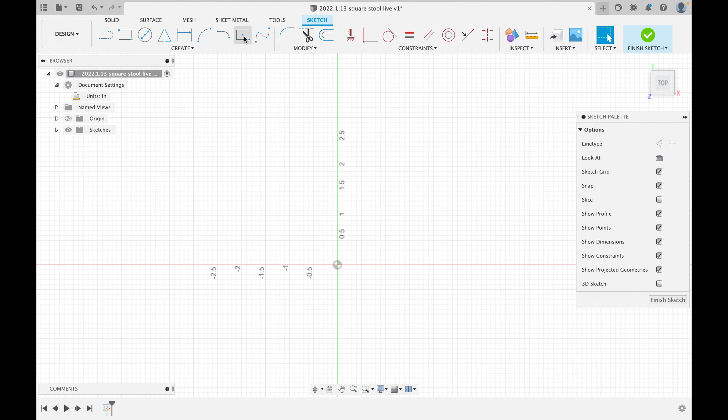We're going to start by clicking on new sketch, and we'll model from the top down. The first thing I like to do when making a sketch is create a center point rectangle and create a box from the center. Because this is a square stool, I want to make the two sides equal, so I'll click on the equals constraint and click on one side, then the other. Now those two sides are exactly equal, and I'll hit escape to get out of that tool.

Now I'll click on the dimension tool, click on any of the sides since they're all the same, and click on the background. How big is our square actually going to be? We're going to model this as a 16-inch stool, which is a lot bigger than our view screen, so I'll scroll down with the scroll button on my mouse, and now I have a 16-inch square. I'll hit escape to get away from the dimension tool.

Now, that's not the stool itself - that's the boundary of the stool. So I'm going to double-click on any of those sides to select all four, and hit X, which turns that into a dotted guide line. This doesn't actually impact anything in terms of cutting up the sketch - it just shows us where the outside lines are.

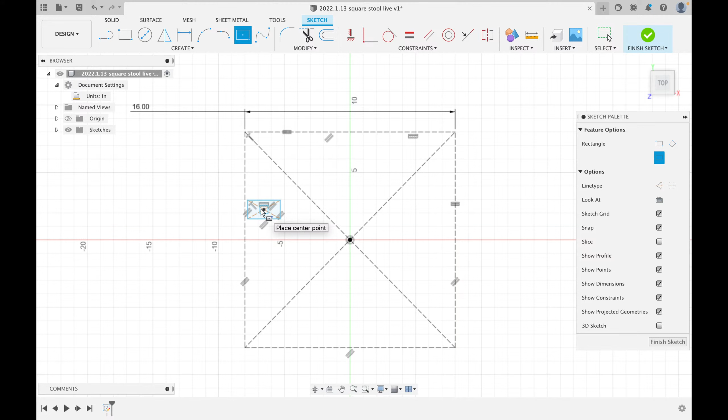Now what we want to do is create a square leg. I'll create this with a center point rectangle, and draw a square leg - it doesn't matter exactly where, just somewhere to start. We're going to make that square leg so it's a little bit inset from the outside. So I'll hit the equal sign and make these two sides equal to each other.

Then I'm going to go to the dimension tool and make a dimensional choice that each of these legs is going to be 1 3/8 inches on all four sides. Now I want to figure out where to put that.

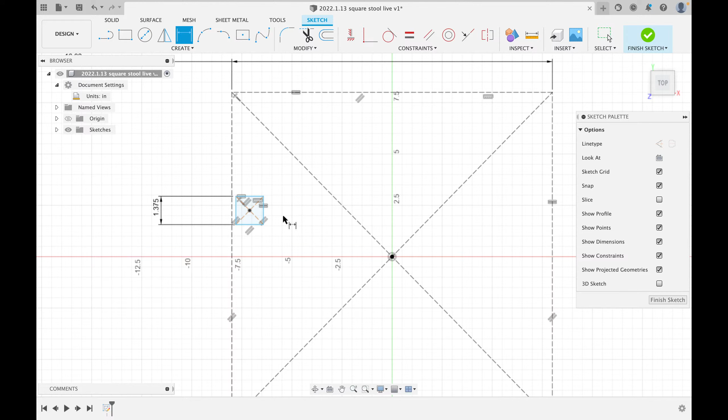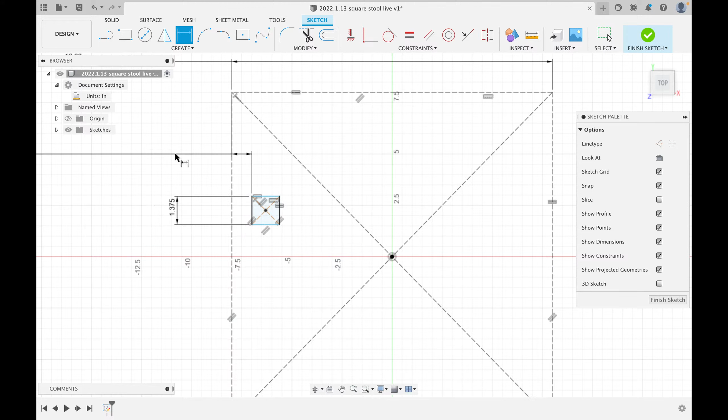If I'm going to have that inset from the outside edge a certain dimension, all I have to do is, again, with the dimension tool selected, select the outside edge, select the side of the leg, and I need to type in a measurement. Now, I'm going to have this inset 1 inch from the outside. But I'm going to have it inset 1 inch from the outside in both directions. So from the side and from this side, 1 inch.

But instead of typing in 1 inch, I'm just going to say it's going to be equal to this by clicking on the 1 inch already there. The reason I do that is not because I forgot it's going to be an inch. It's because if I change this inset measurement here, I want it to change the other one. And if I link them together like this, every time I make one change, I make the other.

Now you can always drag these measurements around so that they're easier to see. I'll drag that one over there, and I'll drag this one over here to be right next to it so that I can see that they're both an inch. Make sense? We can put this one down here so they're even closer to each other. And this one, this is an inch and 3/8. So we'll keep that in mind. And our 16 is the dimension of the outsides of the box. Now, we have that already done.

If we were going to model this easily, we would be able to make, in theory, our top and one leg. Not quite a box yet. What are we going to do about everything else? Well, we want rails at the top, and we want some stretchers down below for our stool. The stretchers are going to be almost at the floor, but they're going to be exactly the same size and shape as our rails, which are going to be, remember, this is a square stool, they're going to be squares.

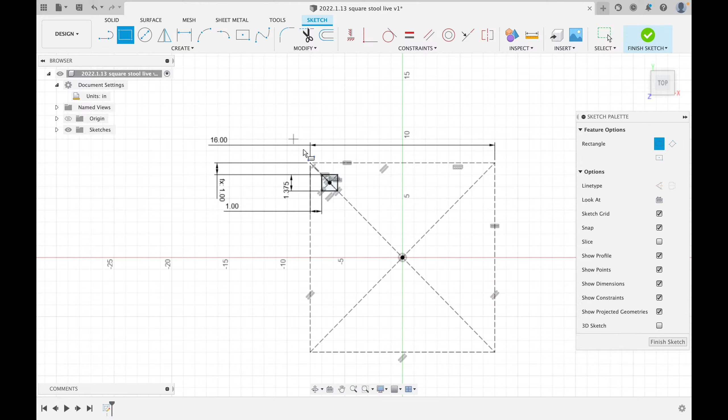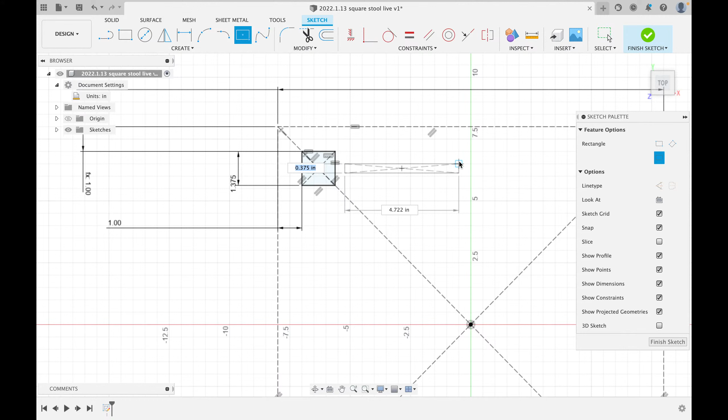So let us take, again, our rectangle tool, and we're going to zoom in, and actually we're going to use our center point rectangle for this, and we're going to draw a center point rectangle that goes from somewhere inside that square to somewhere else inside that square, still in that left top quadrant. Okay? Now, I want that to be exactly the same size as that center piece. And that makes it very easy.

So in these constraints, what I want to do is, with the coincident constraint, make this point the same as this point. I'm going to make this point the same as this point. And I am going to make this line line up with the center point down here. So now we have this exactly in the right place.

Now there is one other thing that we have to take into account, and that is that we're going to have to join these pieces of wood together. We're not modeling in metal where we would just weld them, and we're not modeling in plastic where it would probably just be molded as a single piece. But in wood, we have to deal with joinery. So that means we are going to make a decision about how to join these together.

What I'm going to do is I'm going to join them together using a through mortise and tenon, which is probably the most common joint to be used. But for now, we're not going to worry too much about the mortise and tenon. We're going to worry more about making these three-dimensional models.

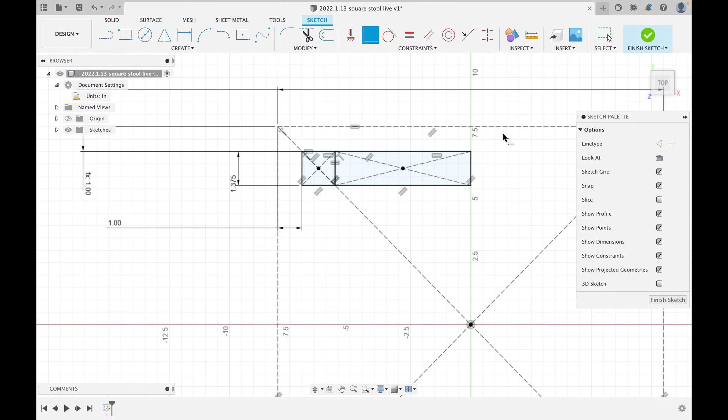So we're not going to worry too much about it for the moment, but we will deal with that after. We're going to come back to this sketch in a minute, but we'll say finish sketch now. First, I want to draw the leg. So I will come up here and I will click Extrude. I will click on the leg blank, and I'm going to drag that down. So you can see it's going negative.

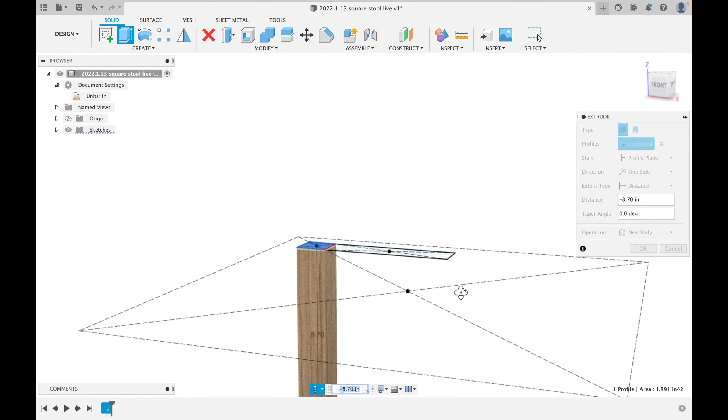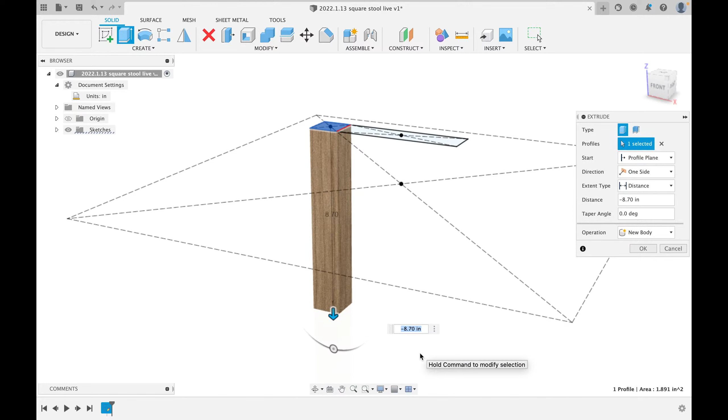How big do I want this stool to be? Well, we're going to give it a nice thick top. The top is going to be 1.5 inches thick. So we want the stool to be a square, and that means we're going to make this... wait a second. Yeah, we want our stool to actually be 14.5 inches, but that needs to be negative to go in the opposite direction. And we're going to say new body.

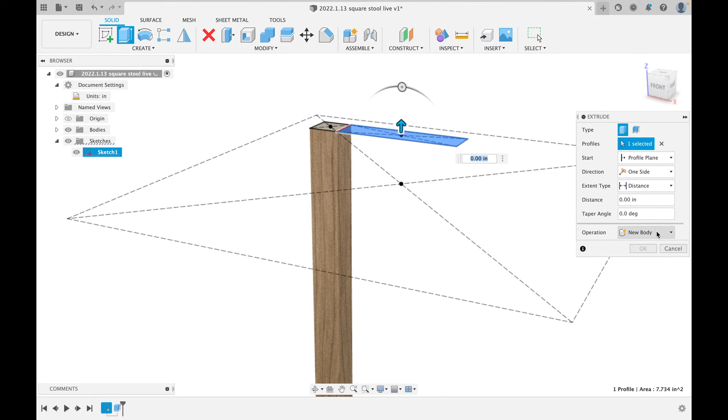Now our sketch is going to disappear, so we can open it back up and turn it on by clicking the little eye. And we're going to model part of a stretcher, part of a rail. Again, we want it to go down, and we're going to see how big this piece is. Do you remember how big that is? Well, we're going to say it might be an inch. I know it's not an inch, but we're going to say it's an inch. I'm going to check to see how big it is, though, to show you how to use the measurement tool.

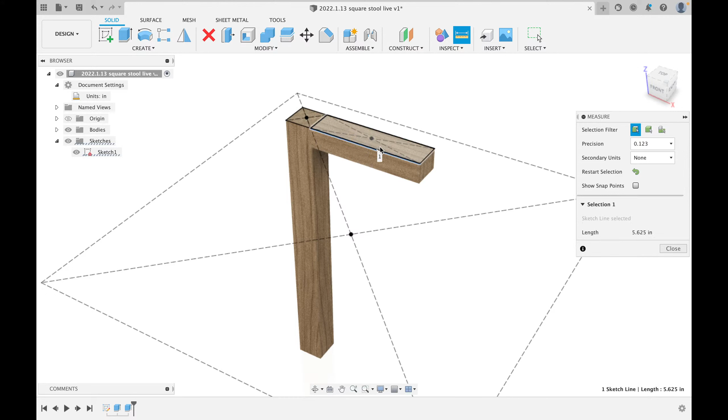If I click on this Inspect, and I click on this line and the other line, it'll tell me it is 1.375 inches, which is an inch and 3/8. So if I go back here and I look at the bottom, this gives us my history. If I right-click on that extrude function and hit Edit Feature, and I change this from -1 to -1 and 3/8, and I hit OK, it has now changed it to be an actual square that is going out from the side of that piece.

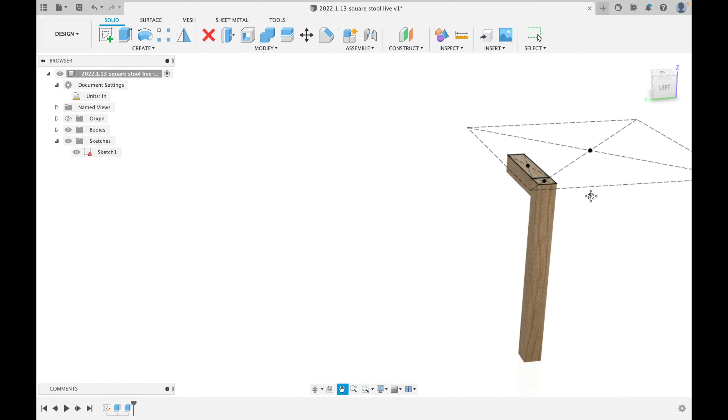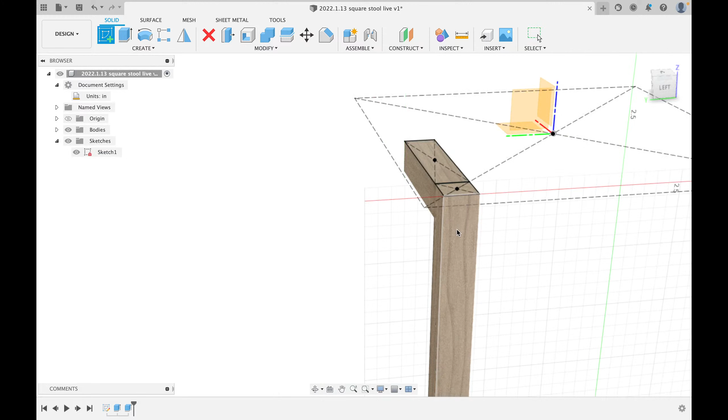All right, we're doing pretty well so far. Now, let's make our mortise and tenon. We've got a few other design decisions that I want to talk about in here, and I'm thinking about them, and as we see them, we might change our mind on how some of them work. I'm going to show you exactly how that can be done. But for now, I'm going to draw the outside face of our tenon on the outside face of this leg.

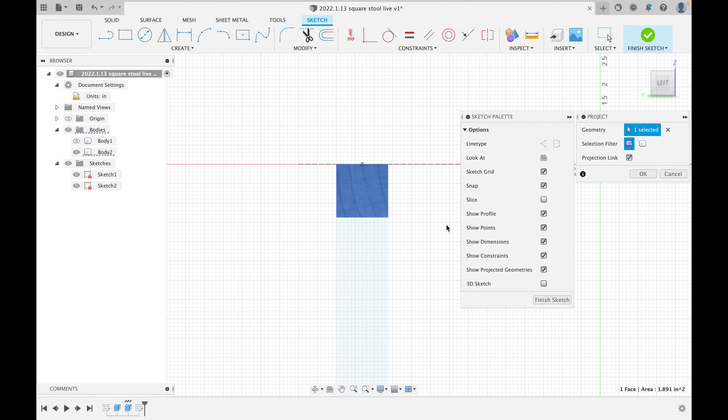Now, I can't see where that other piece is. I know it's an inch and 3/8 down, but I want to be able to see it. So I'm going to open up my bodies, and I'm going to turn off the leg. I'm going to hit P for project, and I'm going to click on this end of the rail and hit OK. And what project does is it allows me to copy the dimensions of any other object so that I can see them in my sketch. So now I see this. Well, I want to draw a square tenon on the end of that piece.

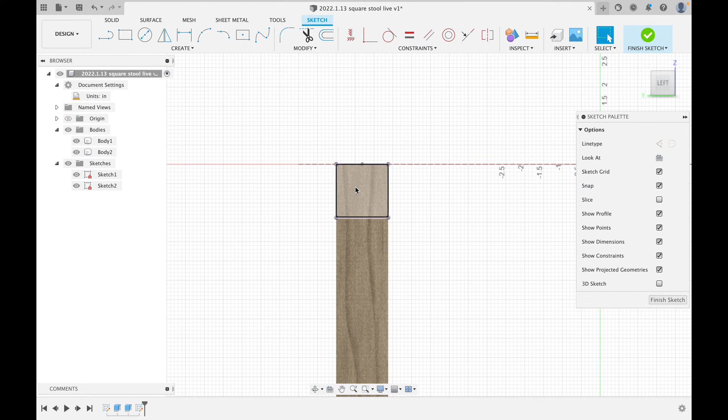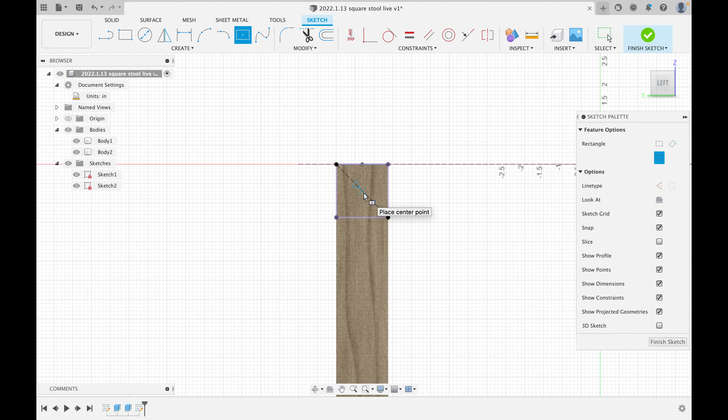So I'm going to draw a line going right from corner to corner. I'm going to hit Escape, click on the line, and hit X to make it a guide. So it's not going to divide anything up. But that line goes right through the center. Now if I hit Center Point Rectangle, and I find the center, you can see there's a little triangle telling me it is the center. So that's the middle of that line, and I'm going to draw a box.

Now, I want that to be equal, which we've already done, one and then the other. So it is a square, and I'm going to give it a dimension. Click on the Dimension tool, click on any side, and I'm going to make that 5/8 of an inch. And that is the dimension of my tenon when I look at it from the end. Now, if I hold Shift, even in a two-dimensional sketch, I can rotate around and see where I'm drawing. And I can now see that I have drawn that on the end of that piece.

Now, if I drew this and I was going to have a tenon that went all the way through, and then I put another piece on there and had a tenon that went all the way through, well, I would suddenly have a huge problem because those tenons would actually interact with each other.

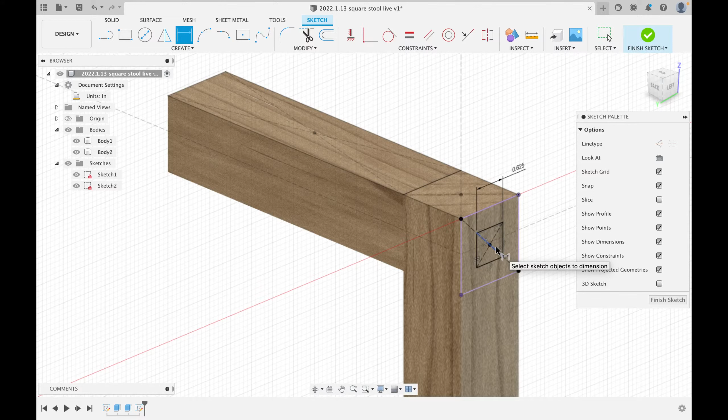So we have a decision to make about these tenons. I can either make them through tenons, and they will conflict, so I can't have both of them through. I can only have one of them through and then one of them be blind. Or I can make them blind tenons, both of them, and one goes in part way and the other one goes in part way.

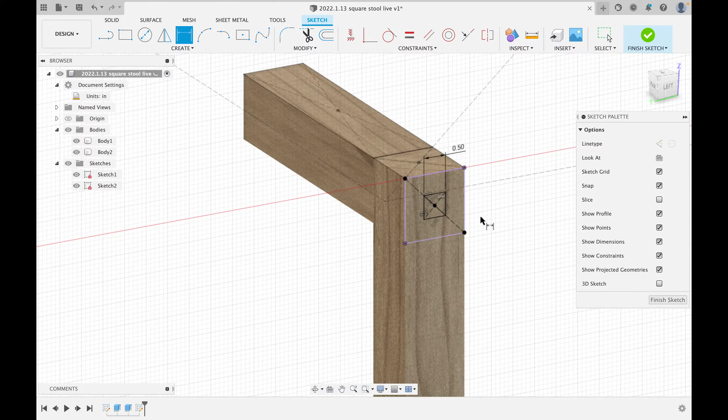Or, and I think this is what I'm actually going to do, on one side I will have one tenon, and on the other I'm going to have two square tenons. And I'll show you how to do that in a second. But if I'm going to do that, this tenon is a bit large. So I'm going to double click on it and say that's 1/2 inch instead. And we're going to have two other tenons go right through.

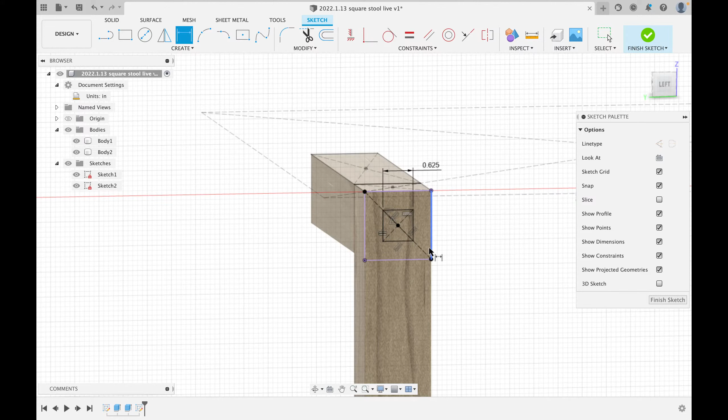Rethinking that, we could have one tenon on the bottom and one tenon on the top. That would also work. So there's lots and lots of ways we can do it. I think we're going to make it 5/8, like we said before, and we're going to just have a blind one going in from the other side, which is totally legitimate.

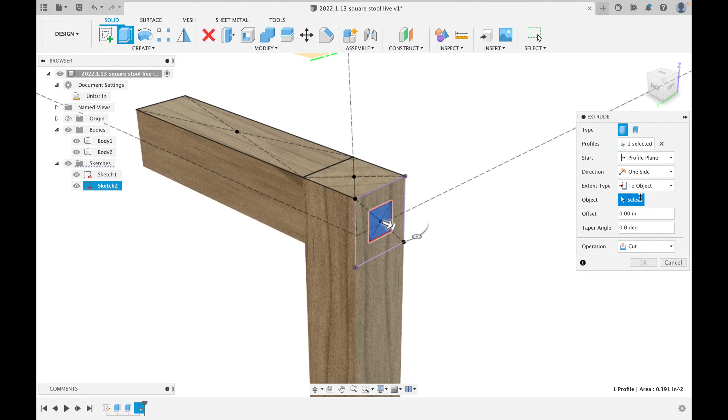Now if we hit Finish Sketch, we see that we have a tenon right here. We want to make that a through tenon, so it is going to be extruded from the outside here, going in, which means it's going to be negative, but instead of distance, we're going to say to object, rotate around, and it is going to go all the way to the inside face of this leg. Now, it's going to say cut, but we want to change that so it is a new body. And that new body is going to be right there. We haven't cut a hole for it yet, but it is exactly where we want it to be.

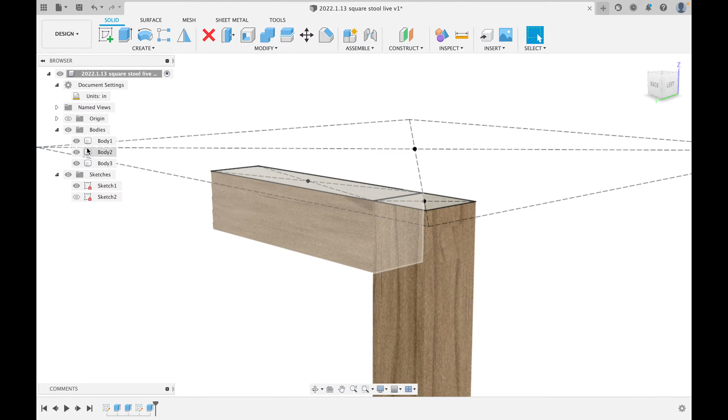We'll turn off that sketch so it doesn't get confusing. And I am going to add that tenon to that piece of the leg. So I will say combine. Not cut, join. Turn off keep tools, and I'm going to add that rail, and I can just go up here on the left. I don't have to worry about clicking on it on the diagram. I can just hit body 3 and hit OK. And now you can see I only have two bodies, this leg and this rail. So if I turn off the leg, you can see the rail has a big square tenon on it. But if I turn off the other one, I haven't actually made a hole yet.

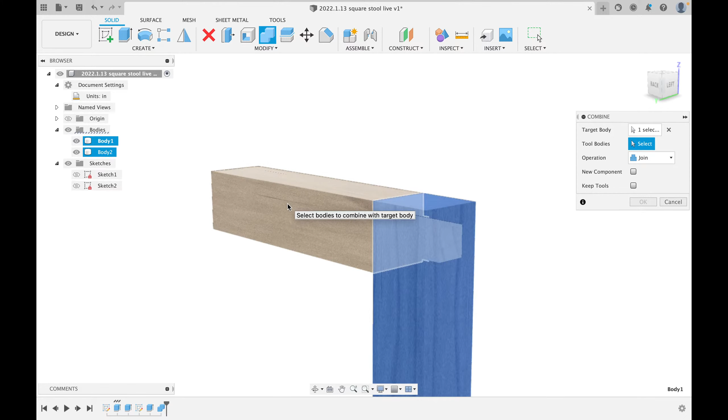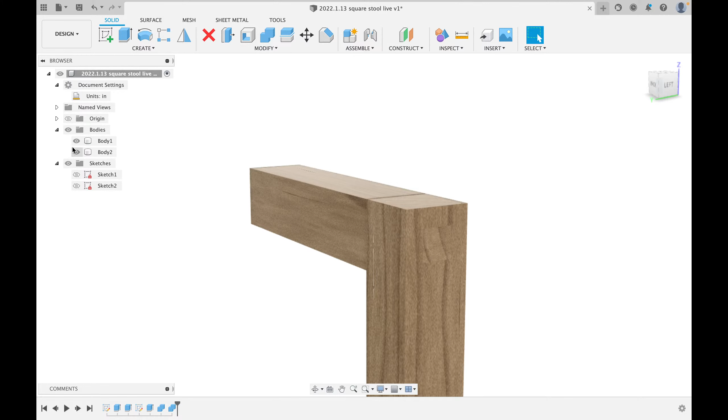So now if I go back to combine, and I take the target being the leg, and the tool being the rail, and I change this to cut, I'll turn keep tools on because I don't want it to delete the rail, and hit OK. If I turn off the rail, I now have a mortise that goes all the way through. And it's exactly the size of the thing that we used to cut it, which is that part of the rail. Now that's great.

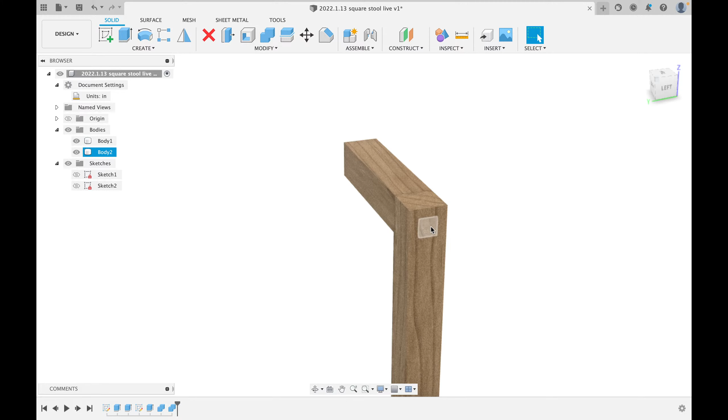Something that we want to think about is we want the same thing on the other side of this leg, but instead of it being a through tenon, we're going to have it be a blind tenon and only go in as far as the inside of the tenon we already have. So if I want to mirror that across that corner, that means it's like sticking a 45-degree mirror up against that corner. So I'm going to say construct plane at angle, and I'm going to turn 45 degrees and hit OK. Now, I think we've actually gone the wrong direction on that, but we'll see in a second.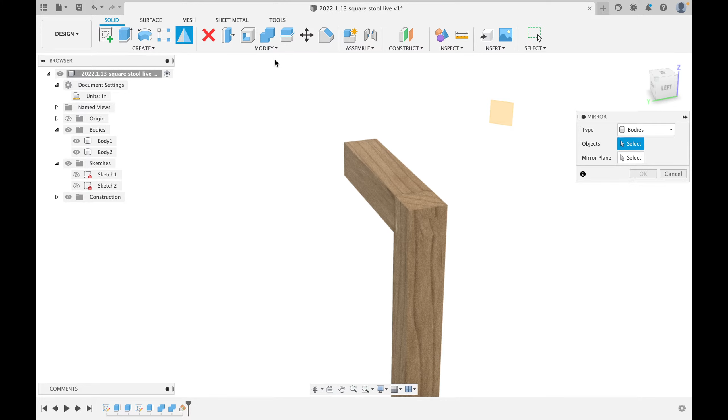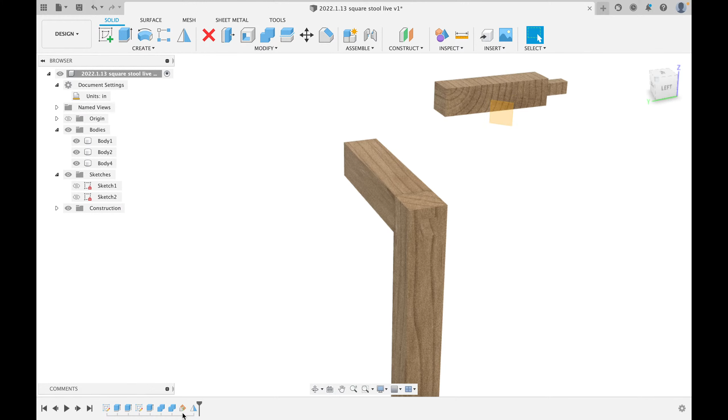If I say mirror, and I check this, and I click on that mirror plane that I just created, it's going to put that totally off in the wrong direction. But that's okay. We don't have to worry about it. I'll hit OK, and it's going to be in the wrong direction, but I can go back to the history, say Edit Feature, and I can drag it all the way around to be 135, which is 45 in the other direction.

Doesn't want me to drag it, I'll just type it in. 135, and now you can see it has mirrored it across this edge. If you look at this mirror plane, you can see it's just like actually putting a mirror there at a 45-degree angle.

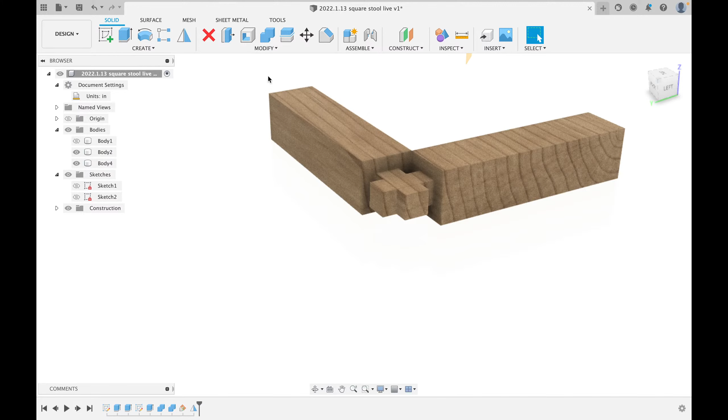Now, how do we deal with the fact that these two mortises, if we turn off this leg, and these two tenons are intersecting with each other? Well, I want to cut the end of one of those tenons off. I want to cut the end off this one that we just made. So I'm going to say split body, that body, and I'm going to slice it with the inside face of this tenon.

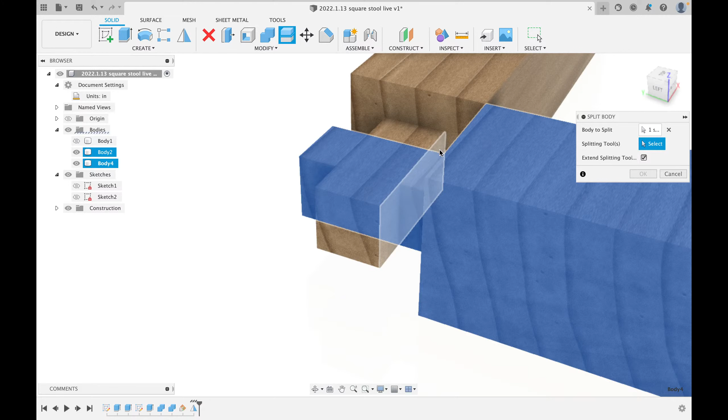I'll just zoom in, and now I'll pick this inside face. And you can see it's going to cut it off. So now we have one piece and another piece. If we right-click on it and hit remove, that part of the tenon is gone, and the only part we have left is the segment of the tenon we're actually going to use to join those pieces together.

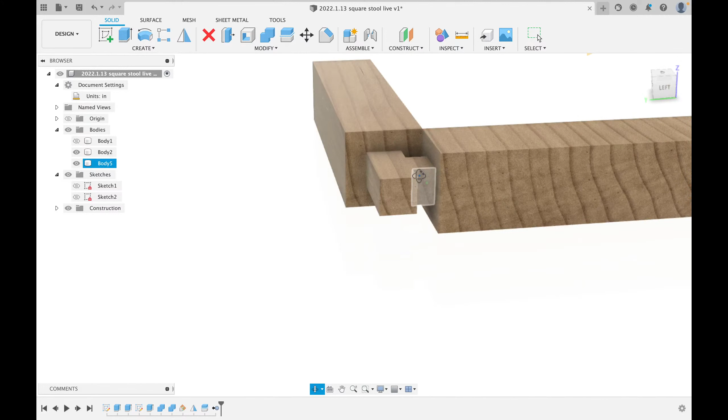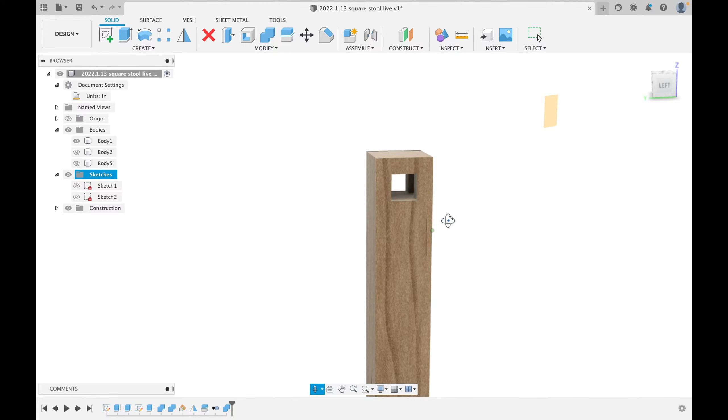If we turn back on the leg, we can do the same thing. We will cut our leg with our piece that has the tenon on it. And now if we turn them off and rotate around, we can see we have one through mortise and one blind mortise right there in our leg, exactly fitting the pieces that are going to fit into it. Now, one of the nice things is that we've now done all the basic joinery for our stool.

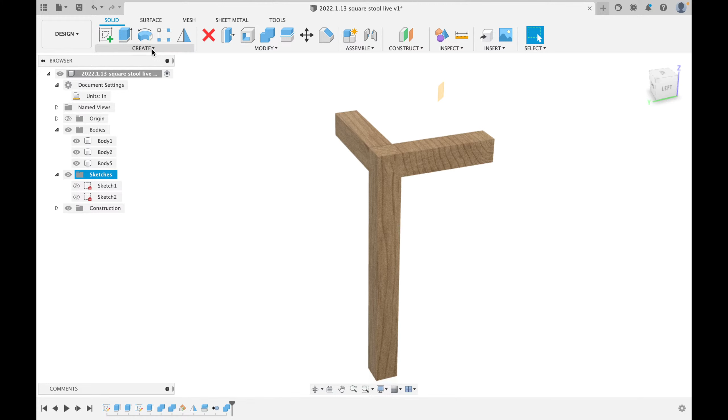But, and this is a fairly significant but, we want to have a stretcher that is close to the bottom that is exactly the same as the two that we have up here. So if I go up here and I say create rectangular pattern, and I pick these two bodies, and I say I want a direction, and it is the up and down direction. I'll drag them down. Now, I don't need 3, I only need 2. So I'll change it to 2,

and now I look at it. Where do I want that stretcher to be? Well, I want it to be about there, spaced 9.5 inches down, and I can always move it. Let's say we want it 10 inches down, and I can say OK. Once it processes, there we go. Now we have the square stretchers.

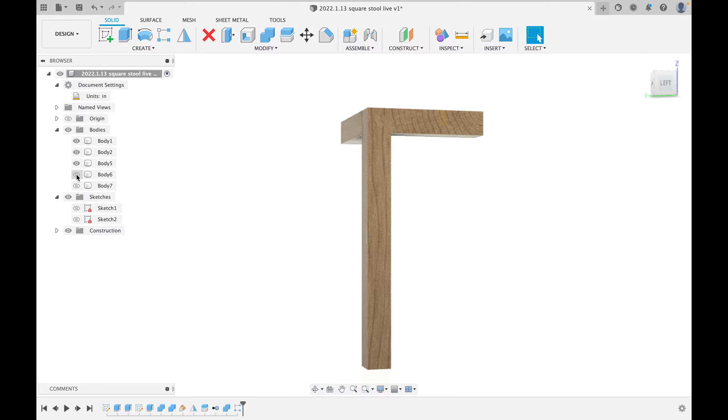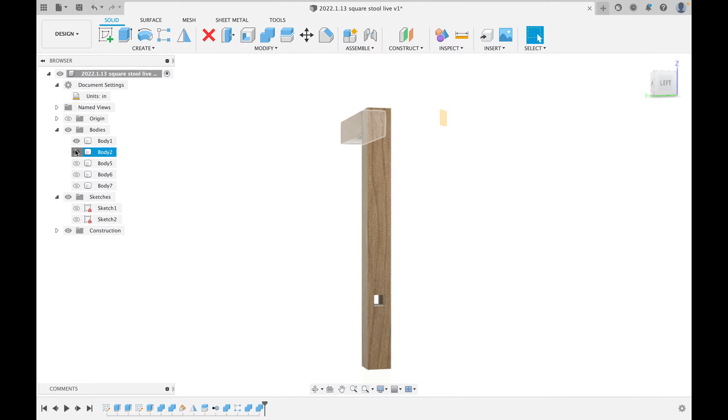Now, of course, if we turn those two off, we don't have any mortises for those tenons. So we'll do the same thing. We'll cut our leg with one side, and we will cut our leg with the other side. If you select the wrong one, you can just turn it off. Cut our leg with the other side. And if we turn all 4 of these off, we'll see that we now have mortises for all 4.

Now this is getting a little confusing over here in the model. So what I'd like to do is create a few components. So I'll say a new component. A component is just a group of bodies that you can change and group and hold together. You can even put components in components. Think of a component like a file folder. You can put a file folder inside another file folder, and you can put pieces of paper inside one of them. So you put the papers into a file folder, then you sort the folders into another folder, and you can sort all of those into another folder, and that's how components really work.

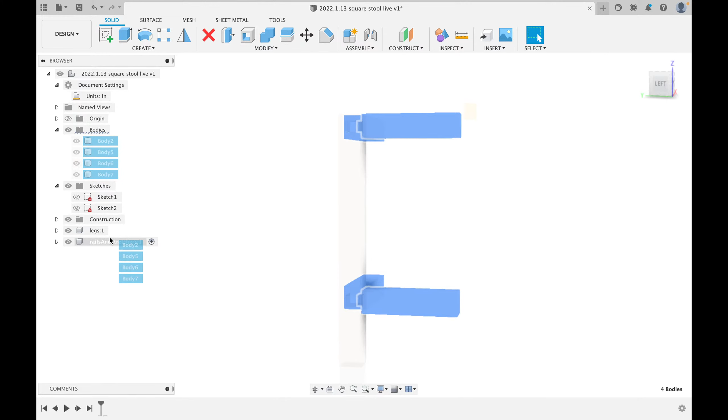So we're going to say legs. We only have one so far, but we're going to drag our leg into our legs component. We're going to say another new component, and our new component is going to be rails and stretchers. We're not going to worry too much about keeping them separate. This is a really simple model. We're going to put all 4 rails and stretchers in a rails and stretchers component.

The reason I've done this with the capital letters in the middle is just to make it easier to read. You don't have to do that. You can just type it all lowercase. You can put a capital letter on the first one. Totally up to you. The names are just for your reference.

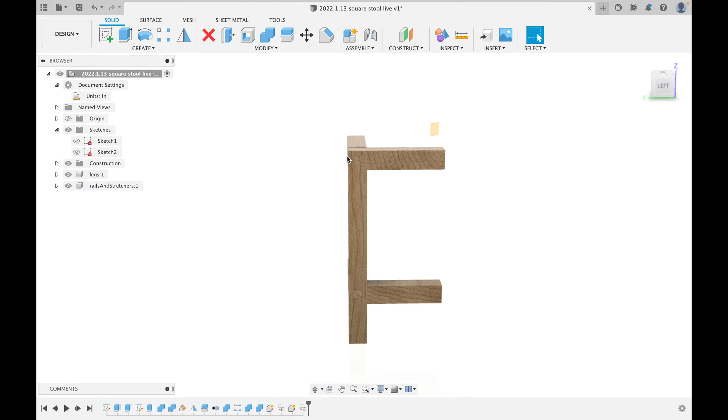It calls them component 1, component 2, component 3, just like it does body 1, body 2, body 3. And this is just to make things a little easier for you. Now, I have this already here, and I'm looking at this, and I think I'd like to go back and make a change to my design. And the reason I want to make that change is because I want to make it look more square.

So I'm going to go back and edit this, and I'm going to drag this piece down so that it is actually closer to the ground. And that feels more like a square to me. And that's fine. Now, we're still missing the top component here, but we'll go back and put the top on in a second. The first thing we want to do is we want to have 4 legs. And we want to have complete rails and stretchers.

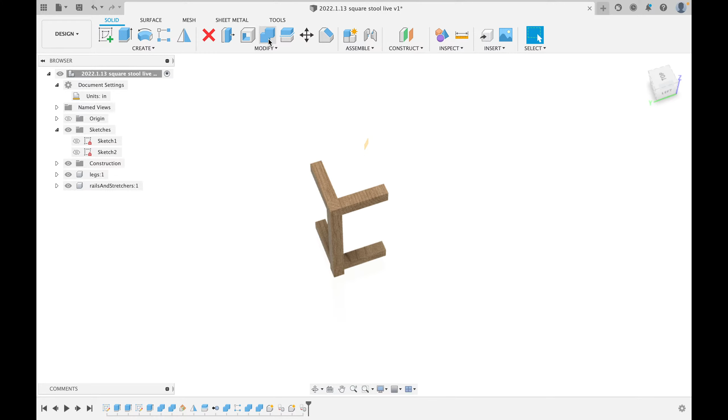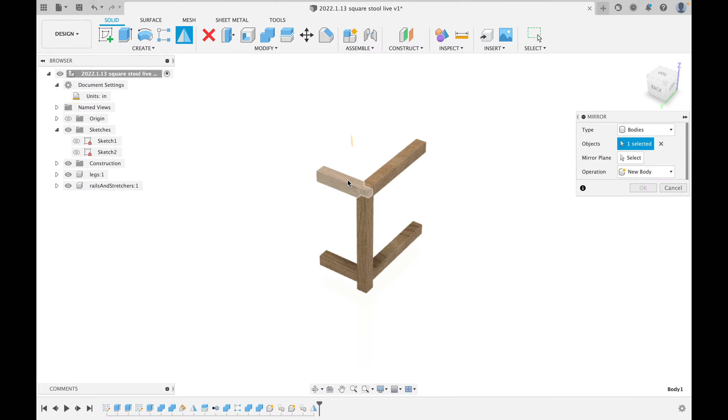So if I say that I want to mirror these two stretchers, these two bodies, and I want to mirror them across the center line and join them to each other, and I do the same thing, repeat, and I pick these two and mirror them across the center line. Well, I seem to be already doing pretty well. I've already got them there, and that's pretty good.

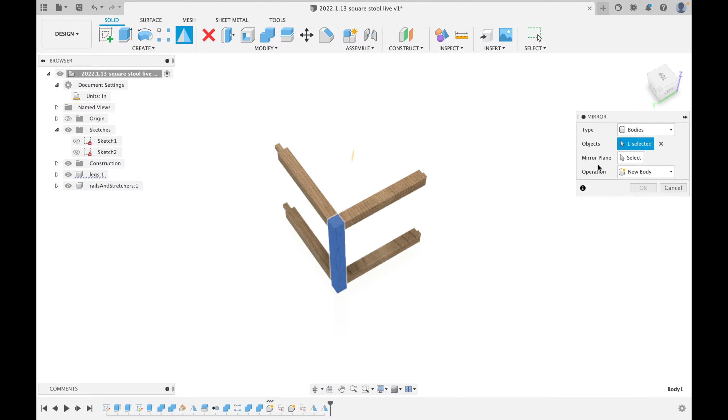Now, I want to be able to do the same thing with the legs. I will mirror this leg across the center line, and I will mirror this leg. I will mirror both these legs across the center line again. And now you can see where we're going with this. I will mirror these two across the center, and I will mirror these two across the center.

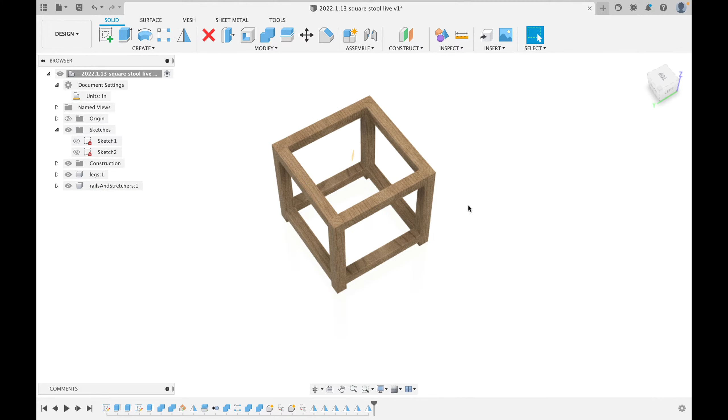There are other ways to do this, and I will explain some of them in the more advanced sessions we do in the future. But for now, if you can just get the hang of doing basic mirrors across center lines, I think you will be very happy with the results, and you'll be able to do everything that way. Sometimes it can get a little slow, but that's okay.

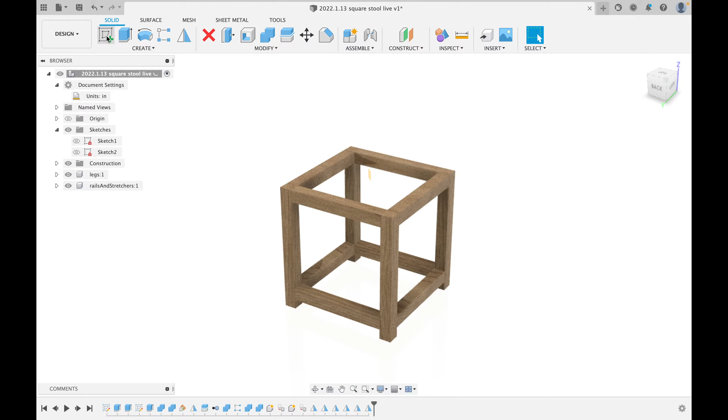Now, the thing we're missing here is the obvious part, the top. So let's hit Extrude, but remember, the top is in our sketch, and we haven't even finished it yet. So let's go back to our sketch 1 and hit Edit Sketch. And this tells us something really interesting. Remember where we were thinking about this as being a square? Well, this is inset. I wonder if that's going to look okay. Well, we'll give it a shot and try. That's half the reason we model.

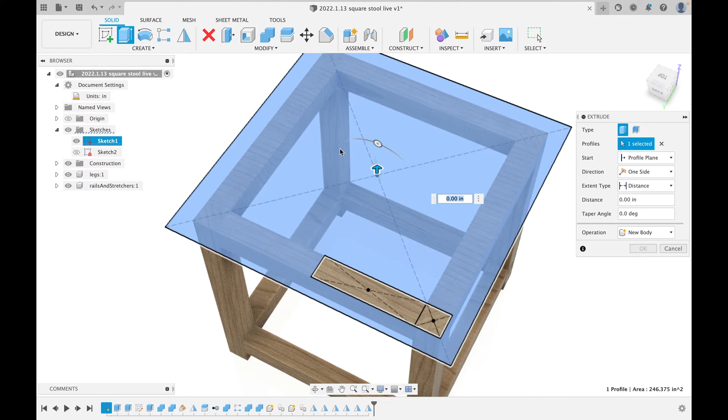We're going to pick all 4 sides. And instead of just using them as guides, we're going to turn them back into regular sides by hitting X and hit Finish Sketch. We'll hit Extrude, turn our first sketch on, and remember, we have to make sure that we select all we need. So yes, that's the outside, but it also covers these 2 pieces. So make sure that the blue part is the part you want to model.

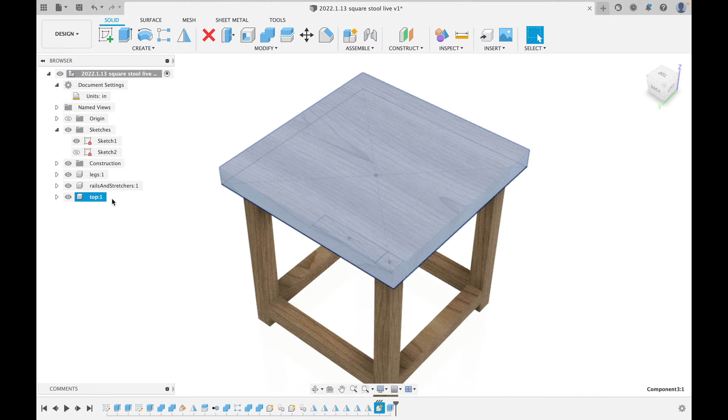Now, we're going to model this to be 1.5 inches thick. We're going to make it a new component and hit OK. Let's call that component top. And we'll look at our stool. And our stool, if we turn the sketch off to get it out of the way, actually looks pretty good. I was thinking I might change this to make the stool actually have a real square edge on it and have them line up. But you know, I think they actually look better this way.

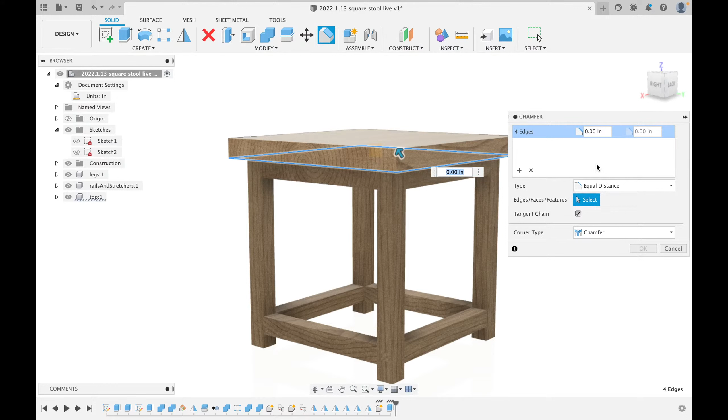The only thing that I would like to do is I would like to go in here and I'd like to chamfer the bottom edge of this. I will select all 4 bottom edges. Come on, rotate around. And I am going to make those go in 1/8 of an inch. Because I think that that will set the top off from the underside. You'll probably want to break all the edges, but I think a nice heavy chamfer.

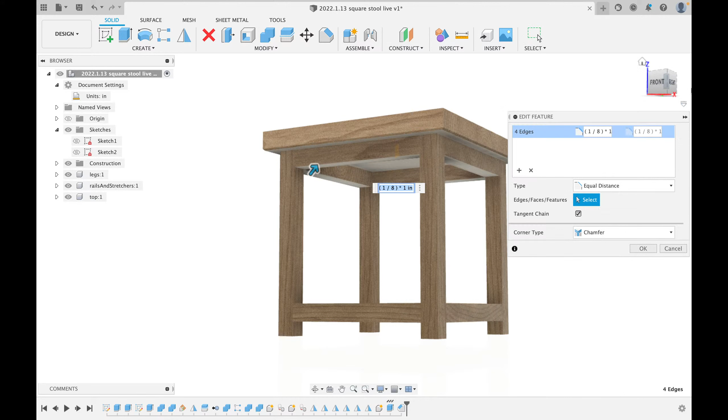I wonder what that'll look like with a 1/4 inch. Let's type it in. The beauty of modeling. A 1/4 inch looks even more like it's separating the top from the sides. I think that's great.

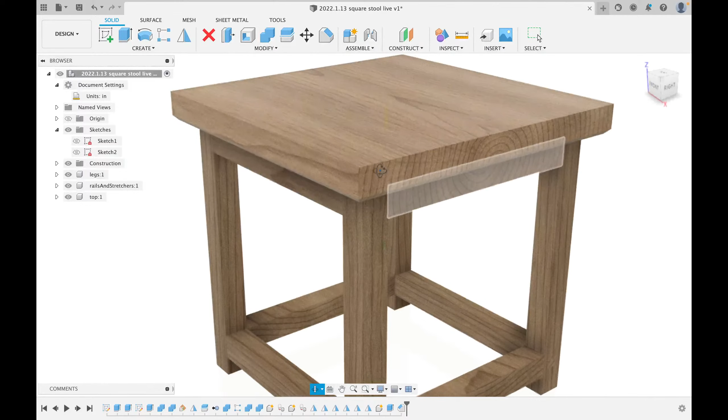Now, something we want to keep in mind is that grain direction matters in these cases. We haven't attached the top down yet, but look at this - this is the grain direction of the top, and yes, the top is probably going to have a grain direction like that. But this piece here on the side, not a chance.

So if we right-click on it and say Texture Map Controls, and we drag that down, and we go 90 degrees off - well, now it's facing down in the wrong direction, but let's turn it 90 degrees the other way. And we will have grain going in the right direction for our model.

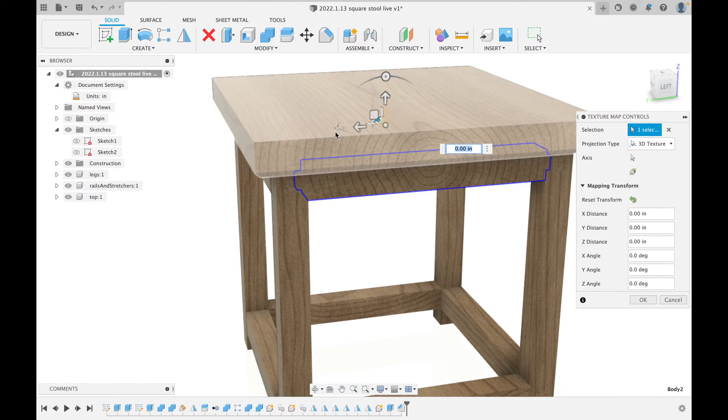Do I do that every time? Well, no, not necessarily. But if you want to see exactly what you're dealing with in terms of grain direction, you can rotate things around in your model.

Move up, let's rotate it around 90 degrees. And I now have grain that is going along the length the way that I would actually build it in real life.

Now, we have to think about this in terms of the grain direction when we're going to be joining this thing down. This is probably a glued up panel here for the top, and we want to join it down, but we can't glue it to the top. If we glue it to the top, it's either going to crack, or split somewhere, or split one of the panels out from where it is. So what we need is a better method for attaching it.

What I would suggest doing is using dowels. Because if you use some dowels, you can elongate the dowel holes when you actually drill them in. We're not going to model them elongated, but you can put in some dowels along the length of these rails, put the dowel holes into the top, make the dowels, glue the dowels right into the top, but have the outside ones float in this rail.

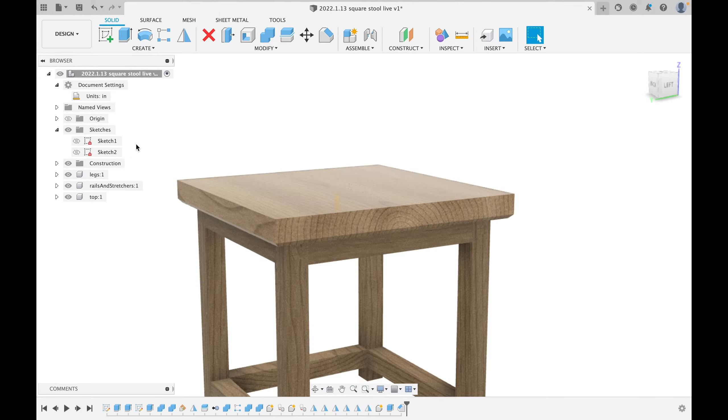So let's actually put some of those dowels in. We'll turn off our top, and we're going to create a new sketch on the top of one of our rails. I want to draw a new guideline that goes down the center because I want all my dowels to be centered. And I will click on it and hit X to make it a guideline.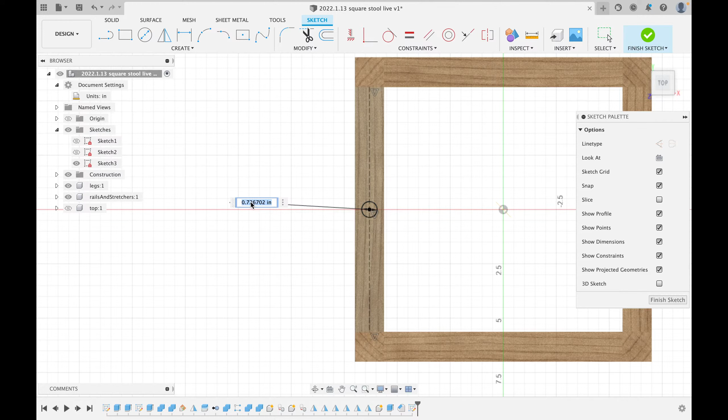I'm going to click on this circle tool, and from the middle of that line, I'm going to draw a circle. I will go to my dimension tool, click on the dimension, and make that a half inch dowel by typing in a half inch. I think that's a pretty good start.

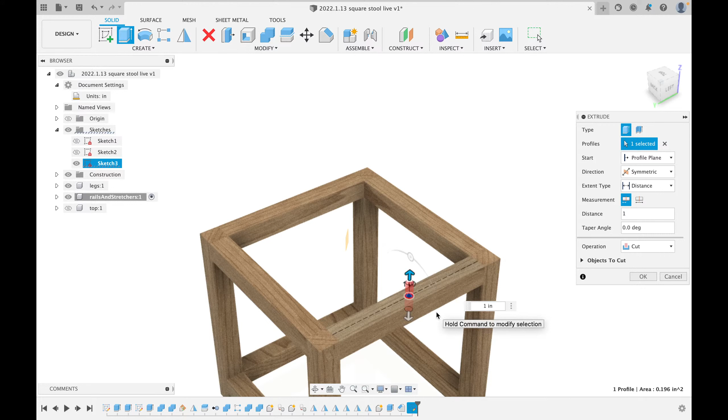Now, you're going to think, oh, well, now I have to draw some other half. Nope, no drawing necessary. We're just going to hit Extrude, click on our half inch dowel, and we're going to say that that is going to go symmetrical, one inch. It'll go one inch down into our rail and one inch up into our top. We'll say New Component and hit OK. All well and good.

Now, remember, we're not going to model the elongated holes along this side here, but the ones other than the center hole are probably going to be elongated, and I would only glue this in just the center on both sides, and I would glue it either to the top or to the rail. In this case, I would glue them to the top, because it's going to be easier to get them in that way.

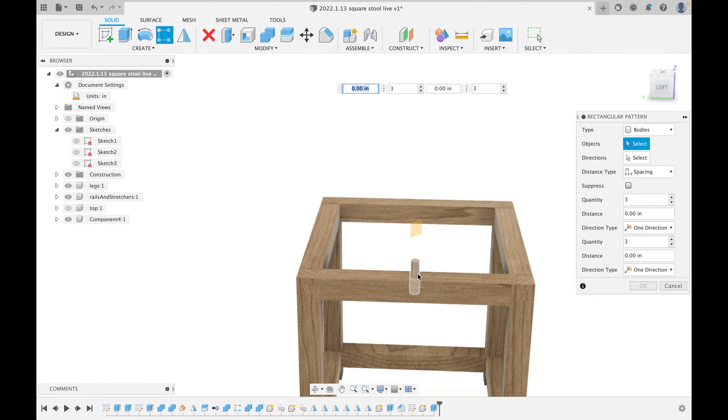So now, instead of there being one, I actually want there to be several. So I will click on this rectangular pattern. Then I will say I want it to go in the direction of side to side, and I'll drag it out. But spacing - symmetric. Now, we want these to be a little further apart than that, and 3 dowels will probably do it. We'll space them 4 inches apart and hit OK.

So now we have 3 dowels. Now, how are we going to get them on the other side? You guessed it - we're going to hit Mirror, pick our 3 dowels, select a mirror plane, mirror it across the center, and hit OK. Now we have 6 dowels. We're going to rename our component Dowels.

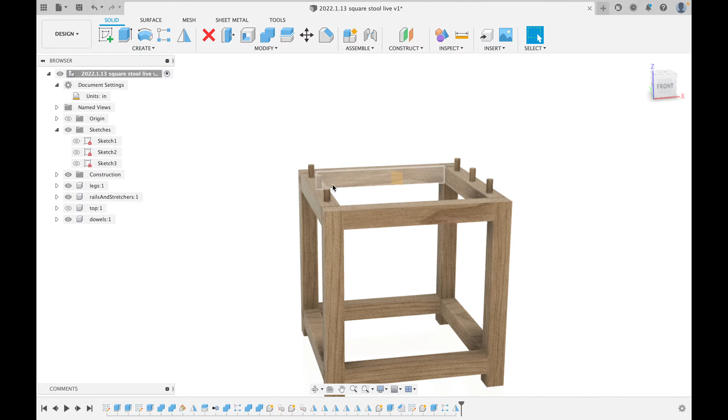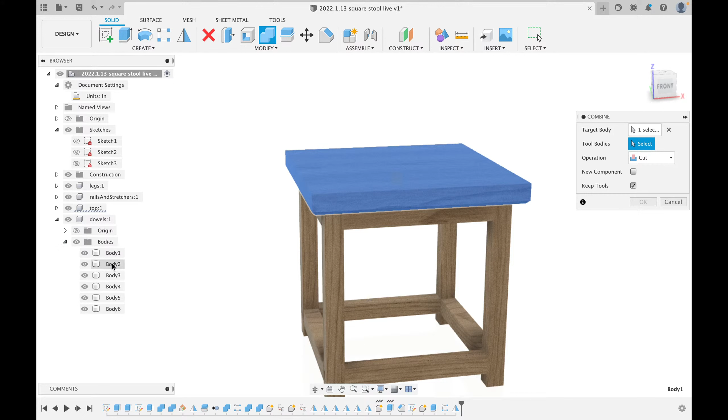If we turn the top back on, you can see our dowels going partway into it - up 1 inch into our 1.5 inch thick top. So if we combine, our target is the top, we open up the dowels folder, select all 6 dowels, and hit OK.

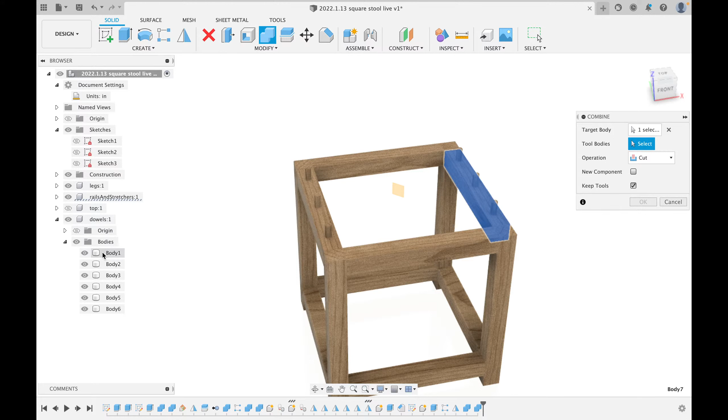We can repeat that for this side by selecting all 6 and cutting, then combine and do the same for the other side by selecting all 6 and cutting. If you cut with something that doesn't actually touch it, it doesn't matter, so it's easier to select all of them than just a subset.

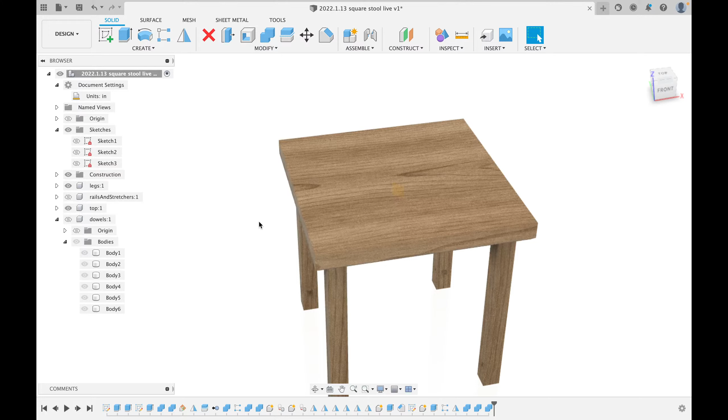Now we already have that in place. If I turn off the dowels, turn off the rails and stretchers, and turn back on the top, we'll look at the bottom - it has our dowel holes already drilled in it. Turn off that plane because it's getting in the way. If we zoom in, see, we have our holes.

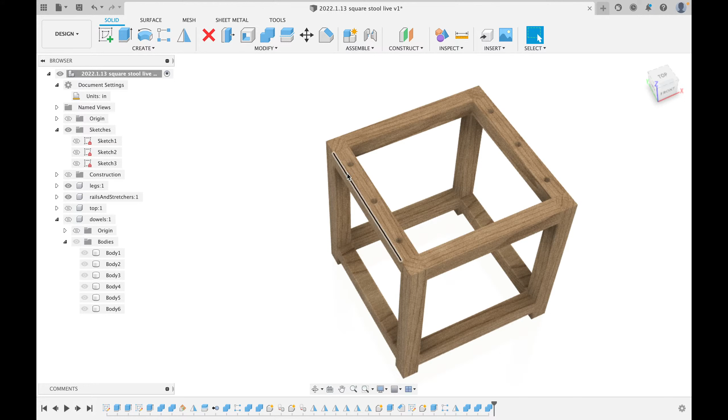If I turn off the top and turn on the rails and stretchers and look at the top, now we have 6 holes right there. Those would be elongated, and I could show you how to model that, but I wouldn't worry too much about it - it's a construction detail, and there's only so much reality you want to do.

So now we have all of those parts, and that is all okay. Apparently I'm running out of power today - I should probably plug it in, but we're good. We're almost finished for the day.

So we have our square stool, we have our mortise and tenons, we have our top, we have our wood movement compensating dowel joinery that gets our top on without actually breaking it. Now remember, this wood panel is going to expand in this direction, out from the center of the tree. It is not going to expand in any significant way along its length.

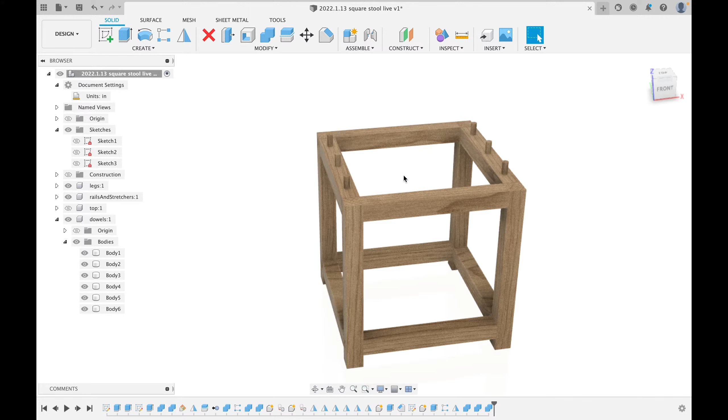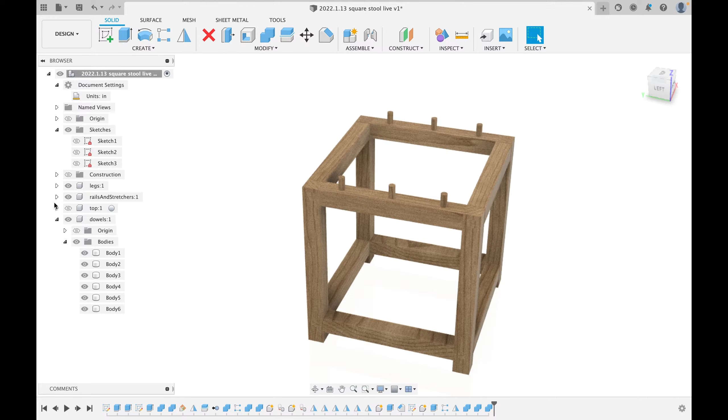So if we look, we're not going to have to worry too much about that because we haven't constrained it in the direction it is going to expand. We're going to leave some space on the outside dowels and make sure we only glue them in on one side, so the center one holds it in the middle and the outside gives it room to float. But when we put the top on, it will expand left to right, and we have no dowels on the sides, which means it is not going to be constrained that way, and it can expand and contract.

A piece this big, if this is flat sawn oak or maple, it's probably going to expand and contract no more than about 1/8 of an inch total across the entire year, but an eighth is plenty big to crack a slab that size. So we have to always take that into account.

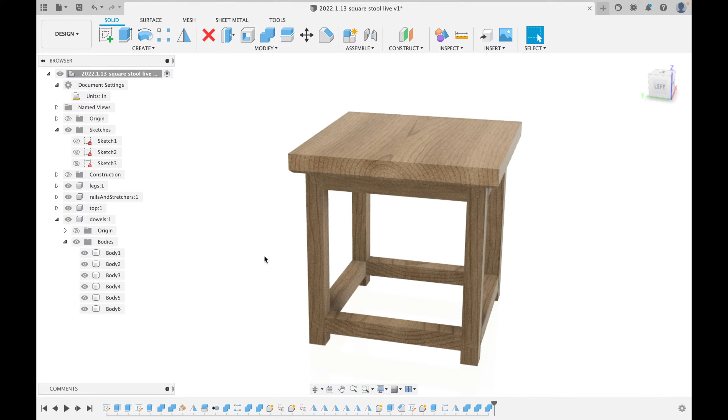Anyway, that's our simple model. We can always move some of those components around if we want to, but I think that looks pretty good. If you want to build this, feel free. If you want to use that as a basic design for anything, just comment below that you'd like to grab our Fusion files, and I'll happily send them over to you.